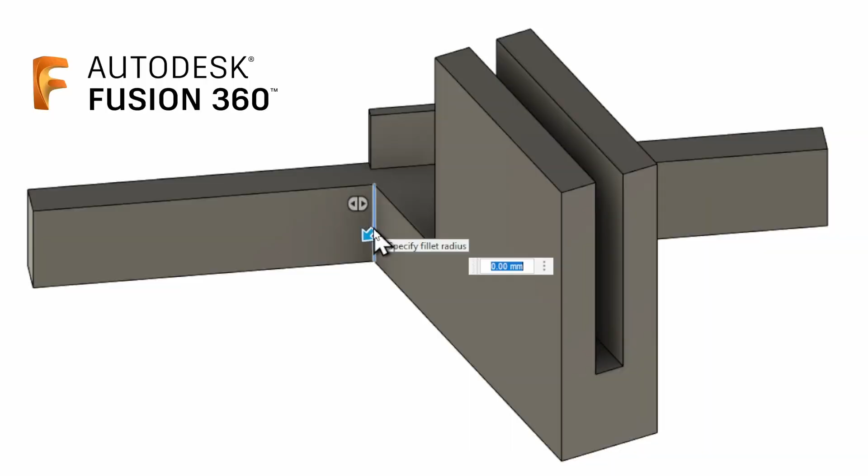We haven't had a design focus video for a while. Today I walk you through the process in Autodesk Fusion to create this handy door prop that keeps the enclosure door of the Sovol SV08 from swinging shut. I want to empower you to design quick, functional parts like this for everyday use, making your 3D printer an even more powerful tool in your home.

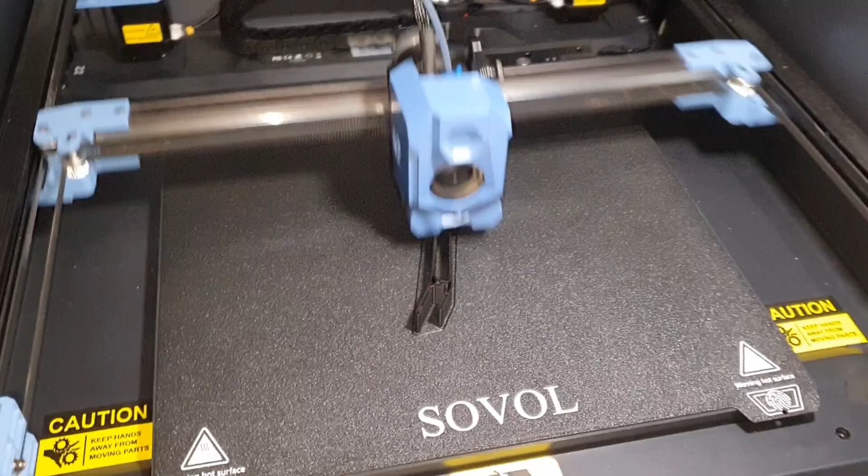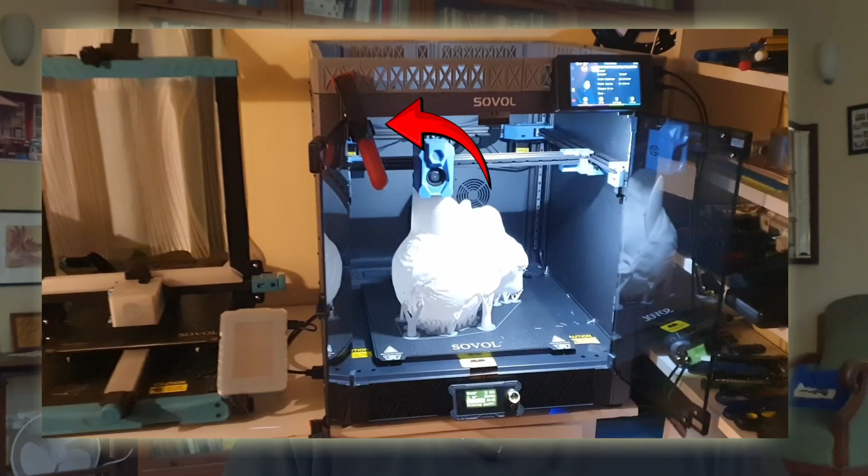In last week's video, I complimented the Qidi Tech Q1 Pro for its door having enough friction to stay open during prints that need regular part cooling. You remember? On the plus side, I do like how the front door has enough friction to stay open, something I'm still struggling with on my SV08. Some clever upgrade will need to be devised there.

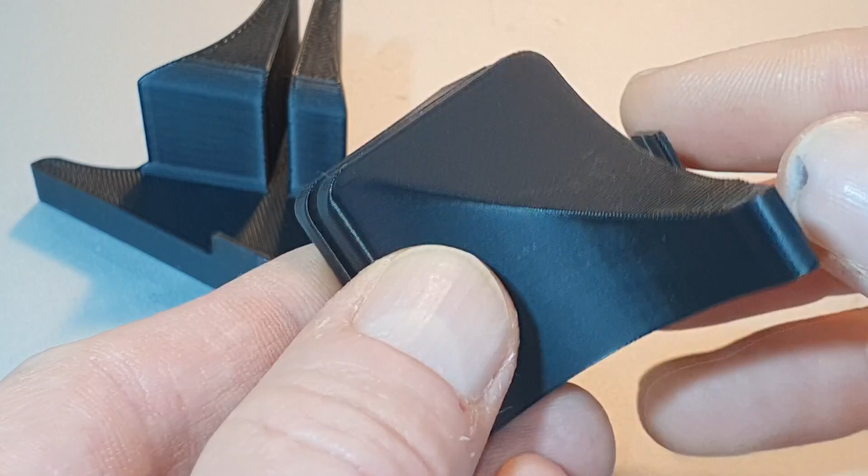Well, it didn't take long. Yesterday, I set out to fix the issue, and it turned out to be so easy and elegant that I knew it was something all of you should try. Autodesk Fusion, which I like to use, is still free for personal use, so you'll be able to follow along. Just be sure to download the limited free version and not the free trial, which would expire after 30 days.

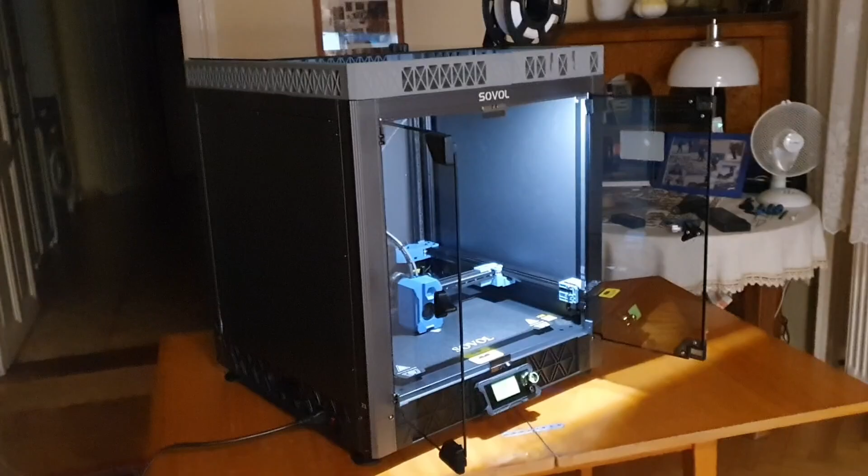Now, the glass doors on the SV08 are beautiful, but the hinges are so frictionless that it's hard to keep them open. Even though my desk isn't slanted, I noticed the left door would close by itself as the printer vibrated during prints. So, in a nutshell, here's what you can expect in the next 12 minutes. We'll kick things off with a hand-drawn sketch and some essential measurements. Then we'll dive into creating a 2D drawing.

Next up, we'll take that drawing and extrude it into 3D space. After that, we'll add fillets for better printability, strength, and aesthetics. Then it's time to slice, print, and hope for the best. But as you might guess, not everything goes according to plan. Can we get it perfect on the first attempt? The good news? Stick around to see.

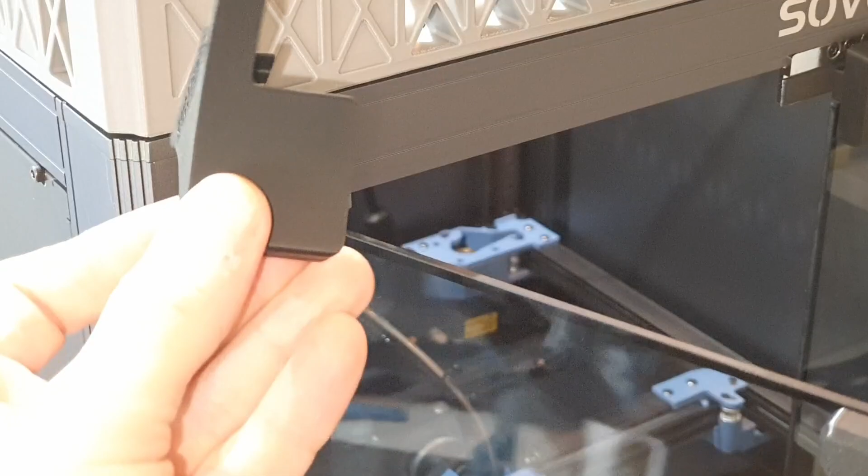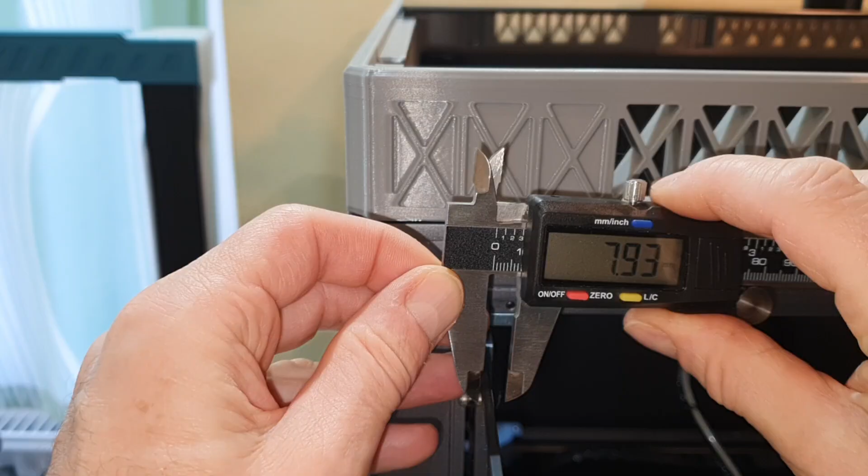As I analyzed the situation, my first idea was to create a part that straddles the upper edge of the door, with two wings pressing against the upper frame of the printer. I used a handy digital angle finder to measure the angle of the fully open door, and my favorite digital caliper for some basic measurements. These are essential tools for functional designs like this.

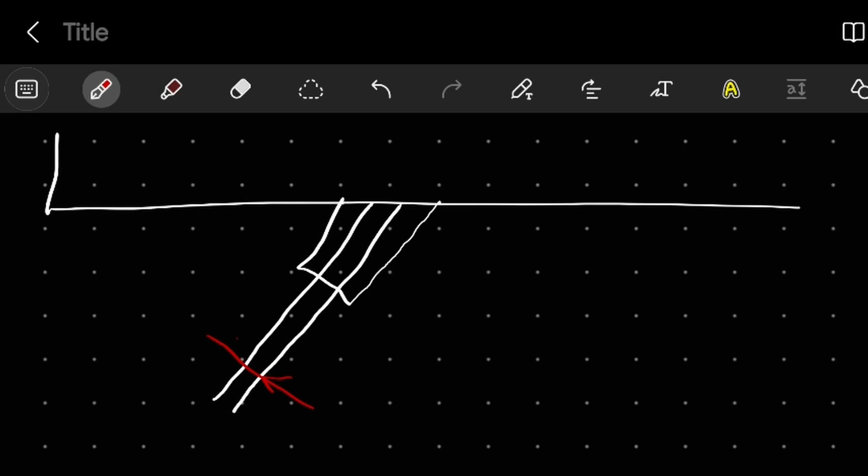After quickly jotting down the values in a simple sketch, I jumped into Fusion to draw the first version. We begin by creating a 2D sketch on the horizontal plane. We'll start with a simple rectangle for the back, measuring 83 millimeters wide and 4 millimeters deep. Don't forget, you can use the tab key to toggle between dimensions when inputting these values.

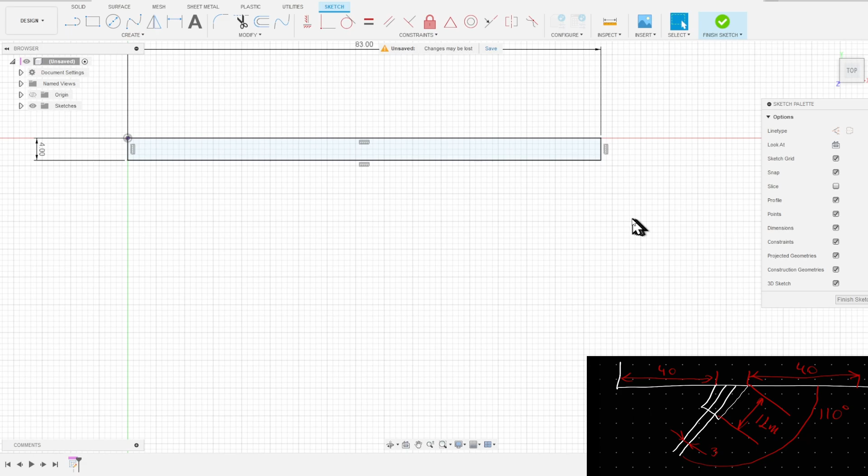Now, last time in Fusion, I showed you how to use named parameters. This time, we'll go ahead and input the measurements directly into the drawing, but keep in mind we'll still be using constraints and cross-referencing related dimensions to make future tweaks a breeze. Speaking of tweaks, let me just tell you up front, this design will need a second revision after printing the first prototype. So if you're following along, watch through the whole process first, since some of the measurements will change in the final part.

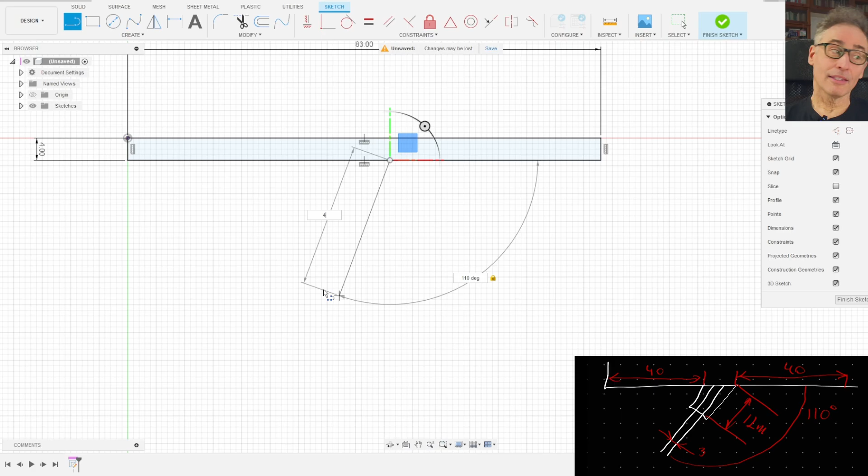Let's move to the glass section. We'll draw one side of the glass, measured at 110 degrees from the side of the printer, making it 40 millimeters long. Then we'll draw a parallel line for the other side of the glass. Don't worry about its length just yet. Fusion does a good job helping with alignment, but we'll use the parallel constraint tool to ensure these lines are perfectly parallel.

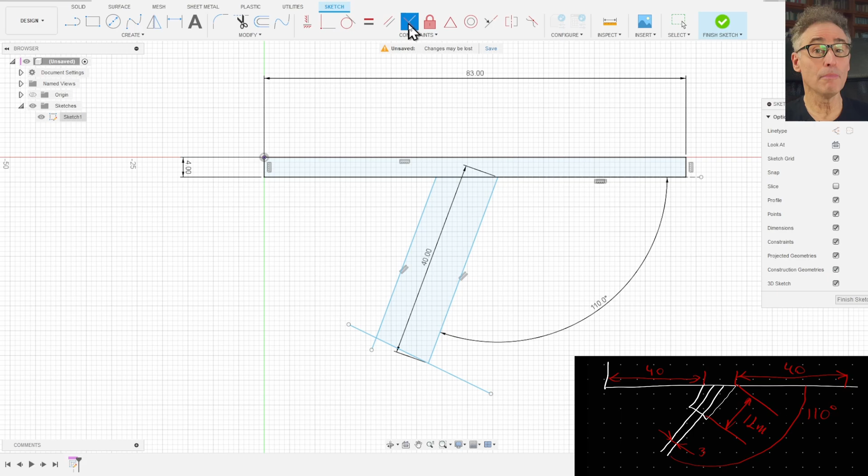Just click on the parallel tool, then on the second line, and select the first line to lock it in. Now, to make the lines equal length, we'll add a perpendicular line to connect them, ensuring it meets the endpoint of both lines. We'll also set the glass width using the dimension tool, 3 millimeters wide with a 0.2 millimeter clearance for the printed part to fit on it.

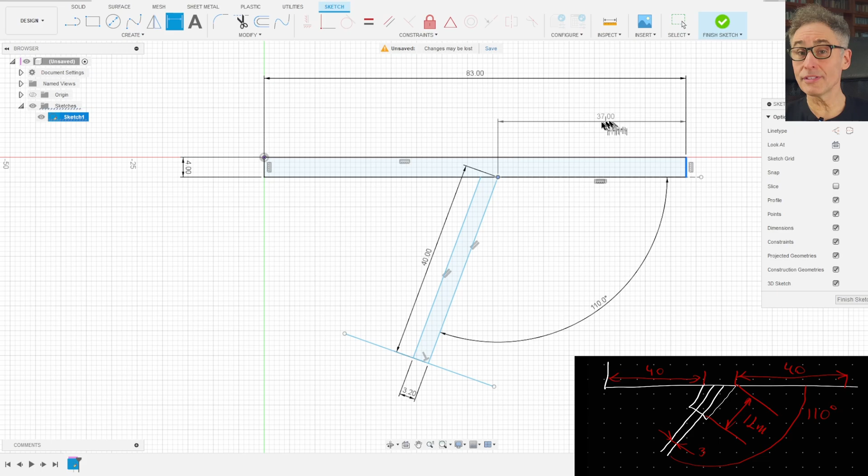Let's position the glass relative to the wings. Set the distance between the base of the glass and the right side of the first rectangle to 40 millimeters, minus half the clearance. For the next step, we'll add 2 more parallel lines on either side, both reaching the perpendicular line we drew earlier. These will form the printed walls that hold the glass. The depth for these should match the depth of our first rectangle.

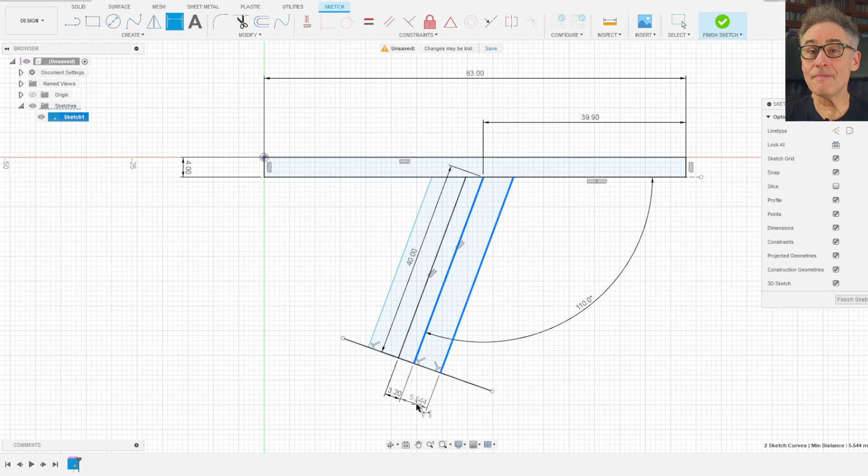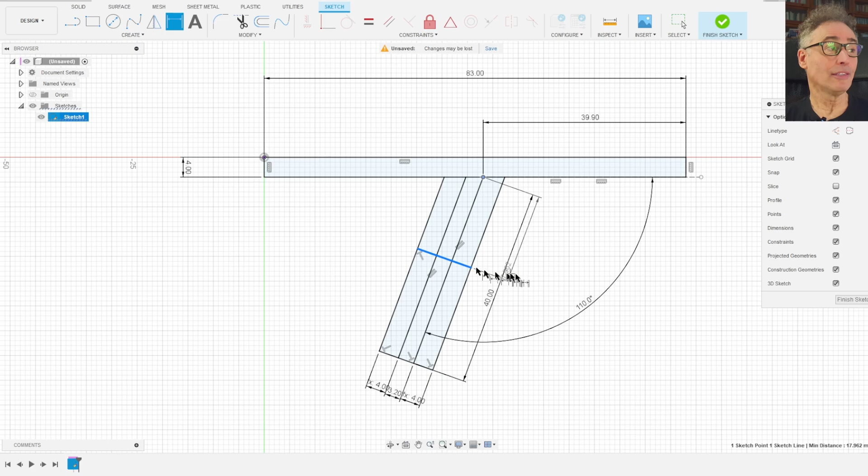Instead of typing the value, we can click on the existing dimension to cross-reference. That way, if we change the depth later, it updates everywhere. See? And we are nearly there. Next, we'll tidy things up by coinciding the endpoints of the lines to clear up the design. Finally, we'll add room for the hinge by drawing another perpendicular line across the 4 walls, setting its distance from the glass base at 12 millimeters, as we measured.

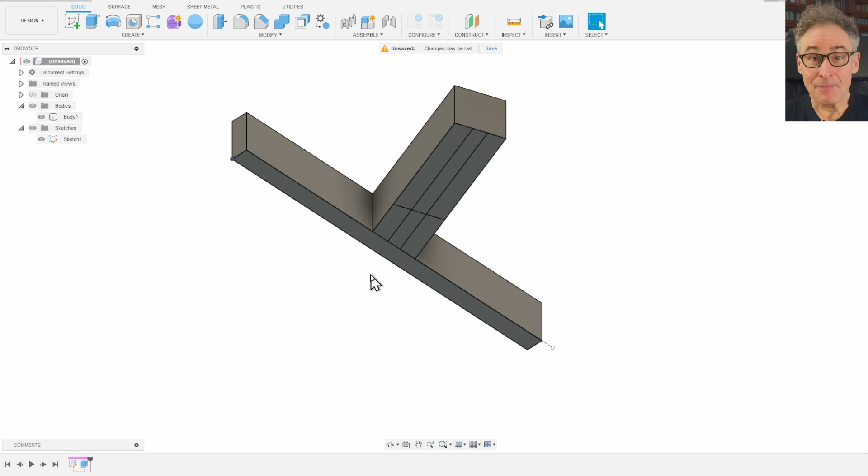Now the fun part. Let's extrude this into 3D space. Finish the sketch, select the extrude tool, and extrude all selected areas to 10 millimeters. It's starting to take shape, right? But we are not done extruding yet. The sketch gets hidden when we extrude, so we'll make it visible again. Select the 2 walls for the glass and extrude those by 25 millimeters or negative 25 millimeters, since we want them to go in the opposite direction. Now we can hide the sketch. Look at that, it's coming together.

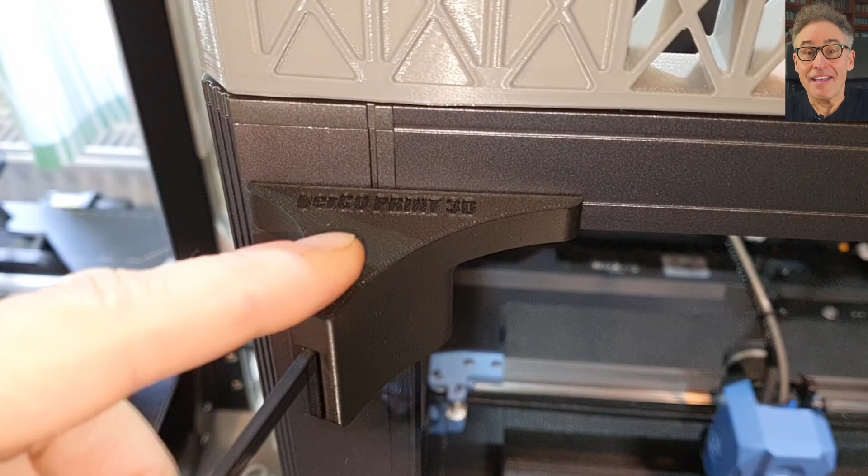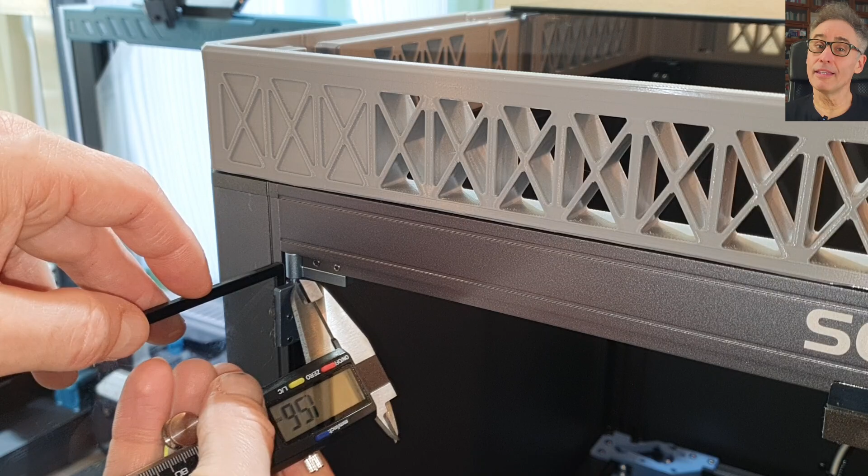This would already function as a part, except for one little problem we've now uncovered. There's nothing keeping this piece from sliding away from the printer at the base of the door. After closely inspecting the door mechanism, I realized there is a 1.5 millimeter gap between the printer and the edge of the open door, about 8 millimeters deep. We'll need to design a small hook to hold it in place.

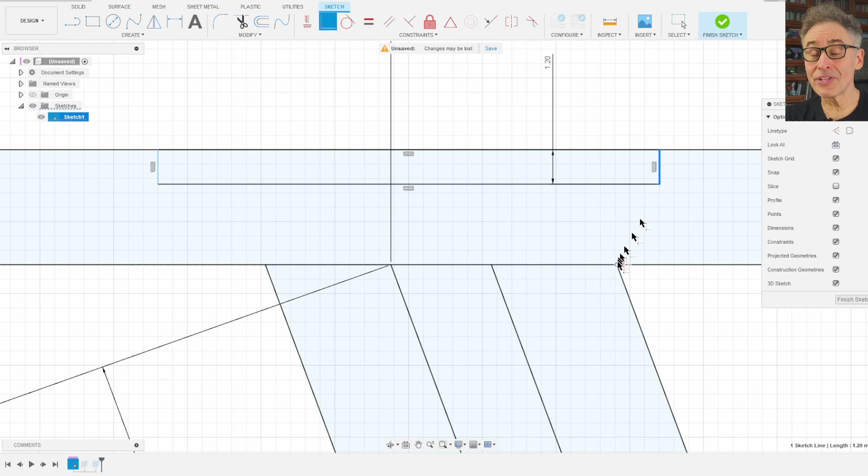Back to the sketch. We'll add a small rectangle aligned with the base of the walls, making it 1.2 millimeters thick to leave room for clearance. Use the coincidence constraint to ensure the ends align perfectly with the walls. Then, of course, we extrude this little hook by, let's say, 7 millimeters. Nice. So, can we print this?

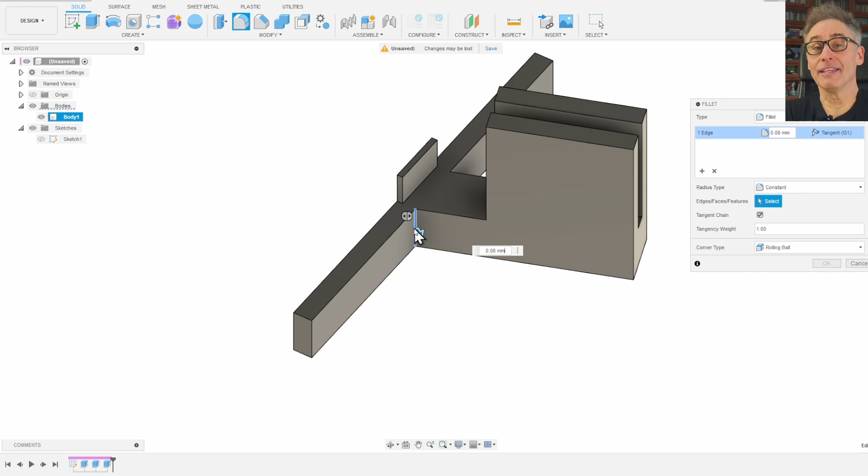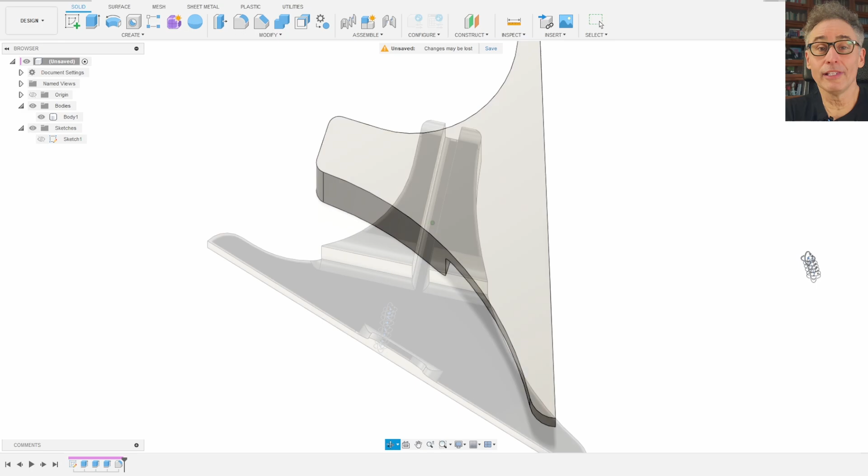Yes, but it wouldn't be very strong. Perpendicular edges along layer lines tend to break easily. This is where the fillet tool works its magic. Fillets round the corners, strengthening the part while making it easier to print and aesthetically pleasing. I tend to add these by feel. Watch how I can select multiple edges at once to round them uniformly. You can apply fillets step by step or group several edges into one fillet operation in the design history.

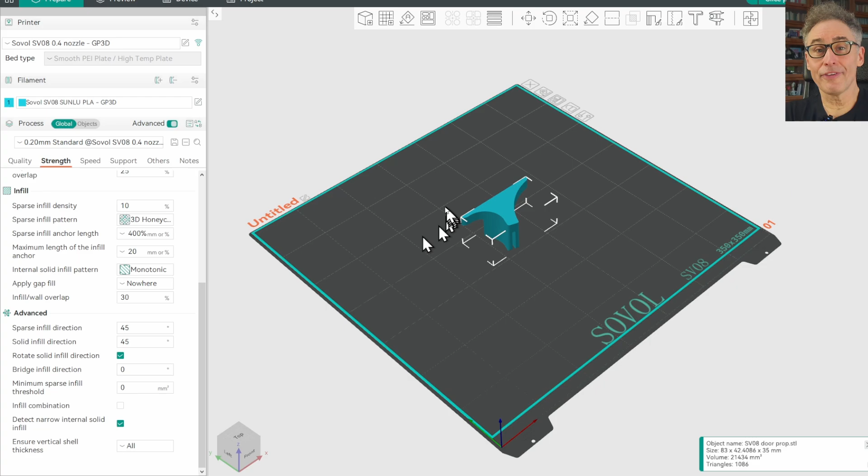And it's all set. Let's rename this body SV08 door prop to make saving versions of the mesh easier later. Right-click and select Save as Mesh. The file name for the STL is automatically generated for us. Next, we can pull the file into Orca Slicer and flip it on its top for supportless printing. For a part like this, my go-to is the default PLA preset.

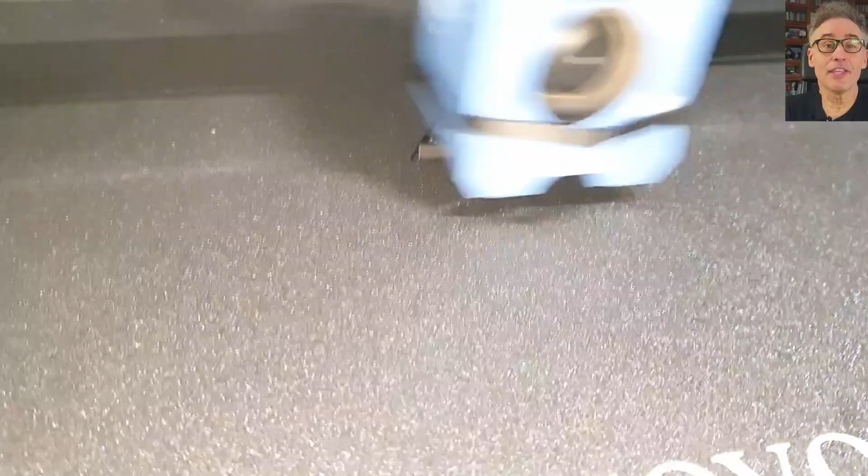After sending it to the printer, I get a perfect first layer, and I have to say, I'm really pleased with the print quality of the SV08. With preprint preparations, this part takes less than 20 minutes to finish.

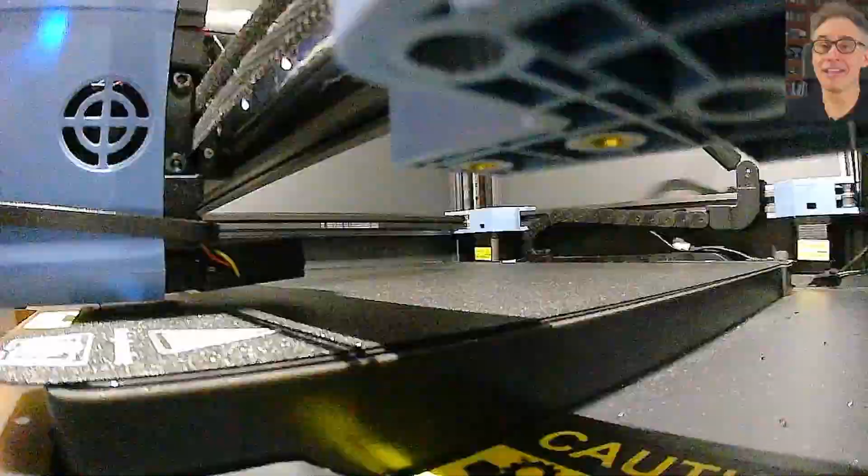While we watch the print, a quick note on printer efficiency. If I had been using my T300 for this short print, it would have been even quicker, thanks to its stored temperature-dependent bed meshes, coupled Z motors, and an AC heated bed.

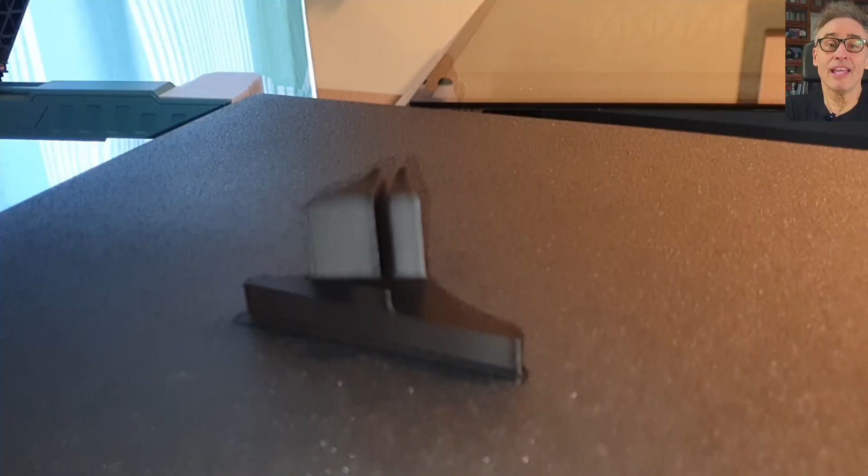The preprint overhead on the T300 is less than a minute compared to the SV08's 5-minute overhead. Either way, the result looks great. It fits the door nicely and does exactly what we designed it to do.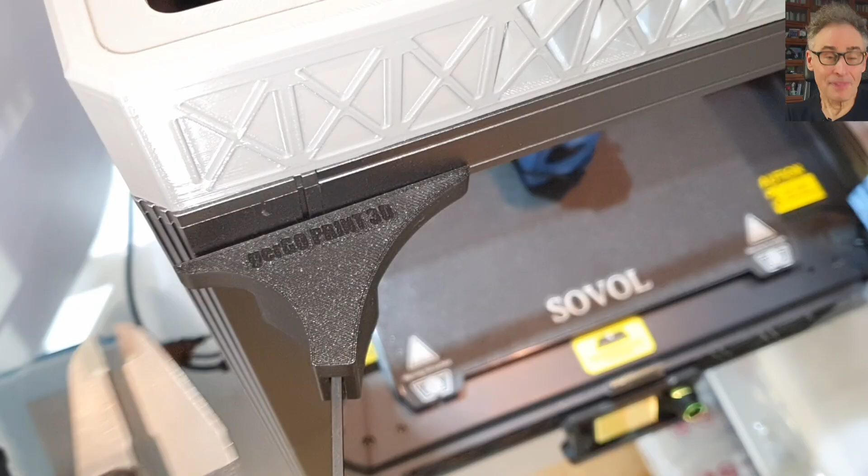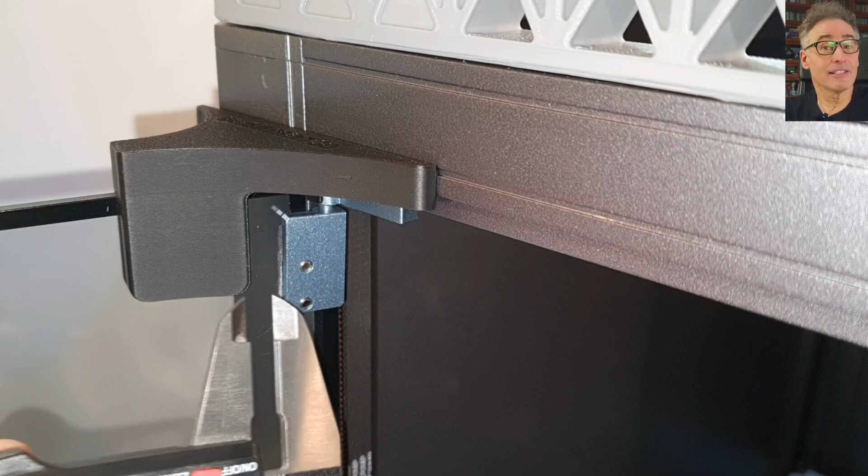That said, I noticed we could make it look even cleaner if we shortened the left wing by 7.5 millimeters. And I also made a slight measuring error on the hinge. It turns out we can bring it 7 millimeters closer to the side of the printer. But here's where Fusion's parametric design really shines, because we set up our constraints properly, updating the design is going to be a breeze.

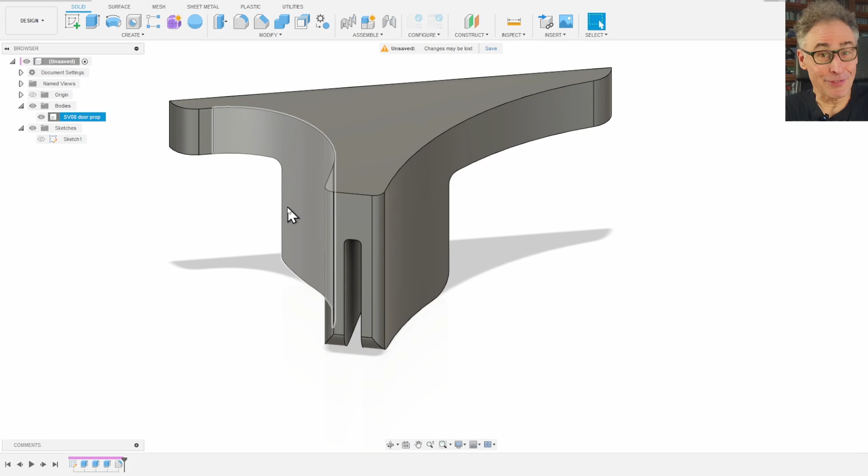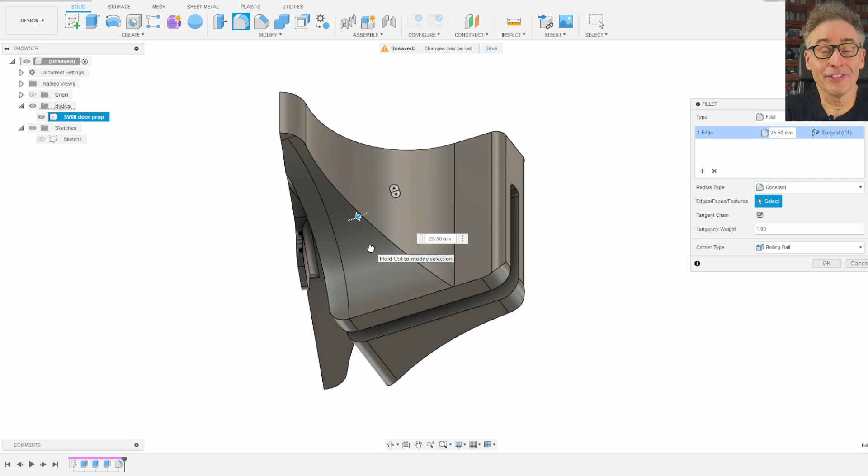So back to Fusion, we double click the sketch, trim 7.5 off the width of the left wing, and reduce the hinge spacing from 12 to 5 millimeters. And this is the magic. The 3D model updates instantly when we exit the sketch, though the fillet on the left side needs a quick tweak. No worries though, just follow your instincts and round a different edge this time. That's the beauty of working with parametric designs. We have so much flexibility.

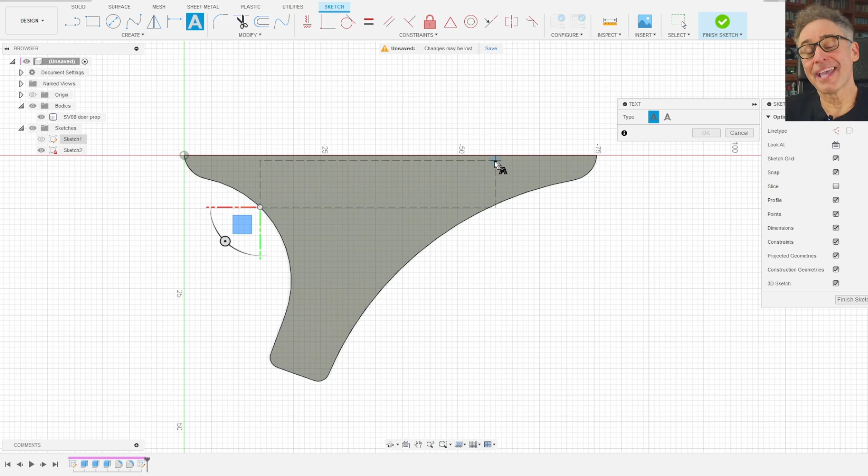And now that we are closing in on the final version, it's time for a little bit of customization. I create a new sketch on the top surface of the part and add a text box to carve in my name. I'm using the font Impact, size 5, centered perfectly. Using the extrude tool, I select the text and set the distance to minus 0.4 millimeters, which will engrave the text 2 layers deep. Perfect since we are printing it upside down on the bed.

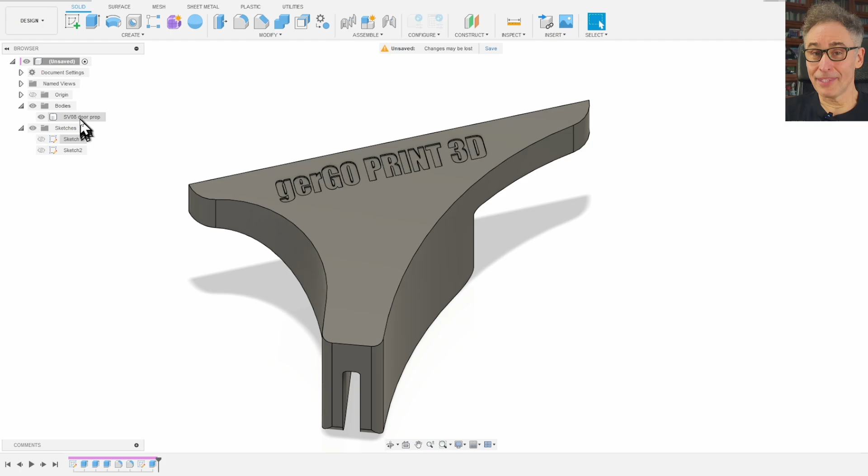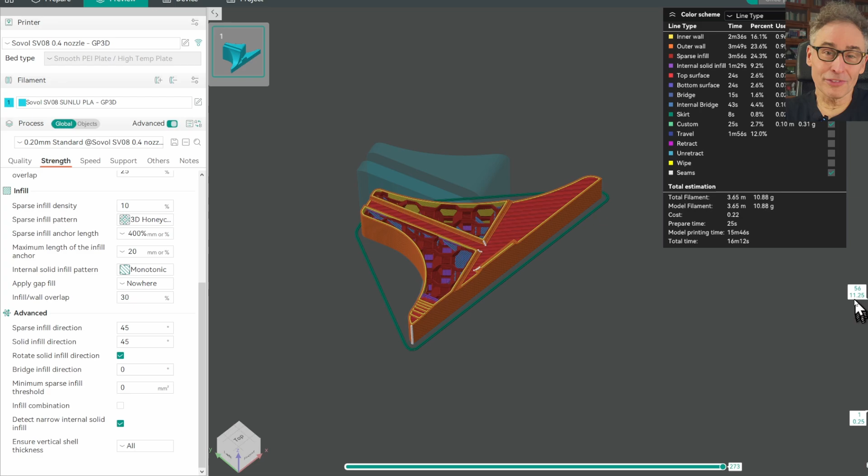Saving the updated design is just as easy. I right-click on the body again and select Save as Mesh, and it automatically overwrites the previous STL. So over in the slicer, we can right-click on the model and just reload it, which keeps the orientation and print settings intact. I could have bumped up the number of walls or increased the infill density, but honestly, the first prototype felt sturdy enough with 2 walls and 10% infill, so I stuck with those settings.

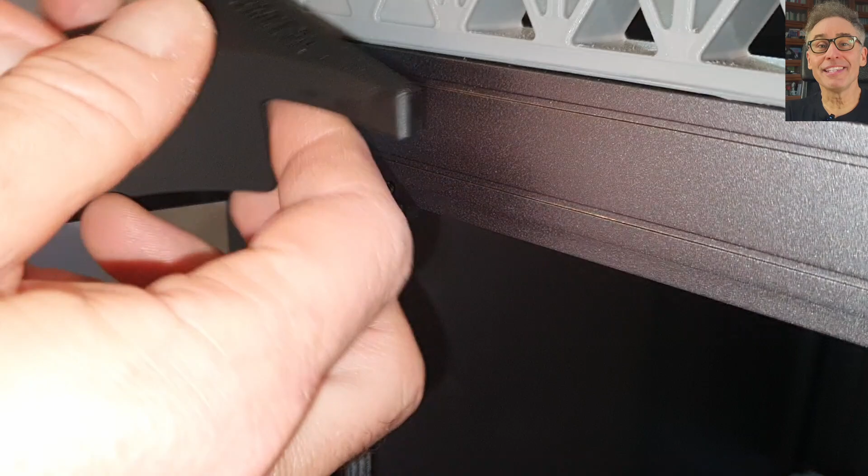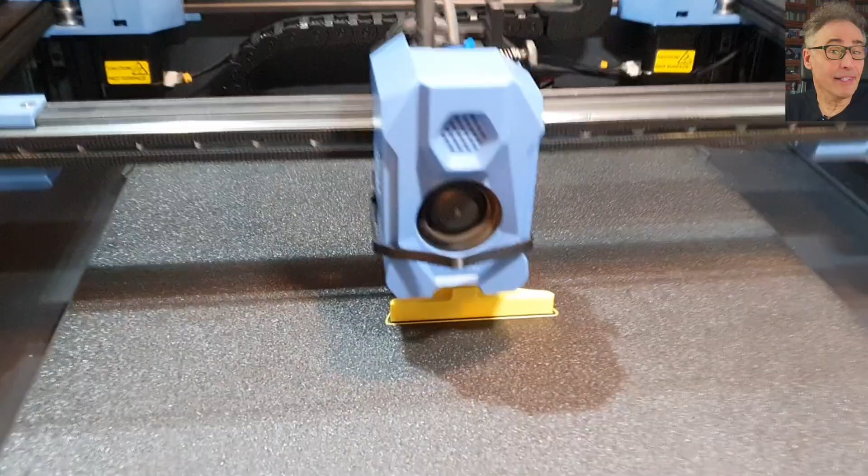Another 15-20 minutes later, we've got the perfect piece this time. It slides right into place and keeps the door propped open just like it should. And here's a bonus tip. If you need one for the right side, simply mirror the print. Just one thing to keep in mind, if you print it in black like I did, it blends into the printer so well that I've actually forgotten it was there a few times when trying to close the door. A more visible color might be handy.